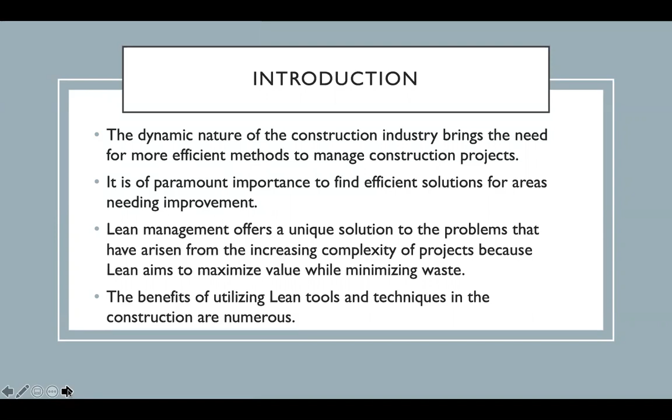Let's go to the background of Lean construction a little bit. Lean is an effective approach for both customer satisfaction and enhanced project performance. Therefore, Lean construction aims to deliver value to the customer. And Lean is even more effective when integrated with other tools and techniques or methods.

Therefore, this study discusses TRIZ methodology in the context of Lean construction. In this respect, the Lean TRIZ approach is introduced first to foster its application in the construction industry for experiencing less waste and higher value.

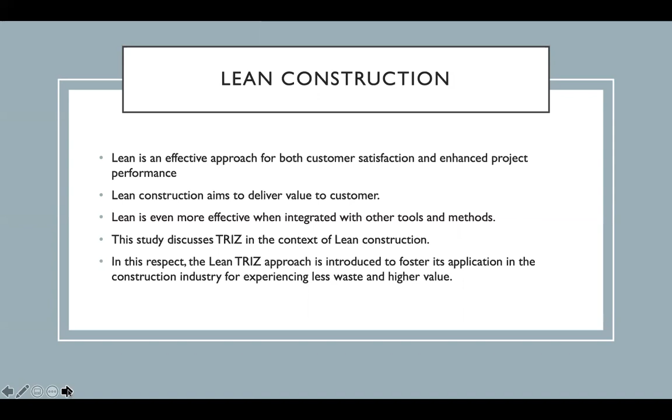TRIZ is the Russian acronym for the Theory of Inventive Problem Solving. It was first discovered by the Soviet Union researcher Genrich Altshuller. TRIZ is the theory of the resolution of invention-related tasks, and it's a problem-solving analysis and forecasting tool derived from the study of patterns of invention in the global patent literature.

TRIZ brings about 40 inventive principles, and it provides trends of technical evolution. It also provides an effects database having at least 76 standard solutions.

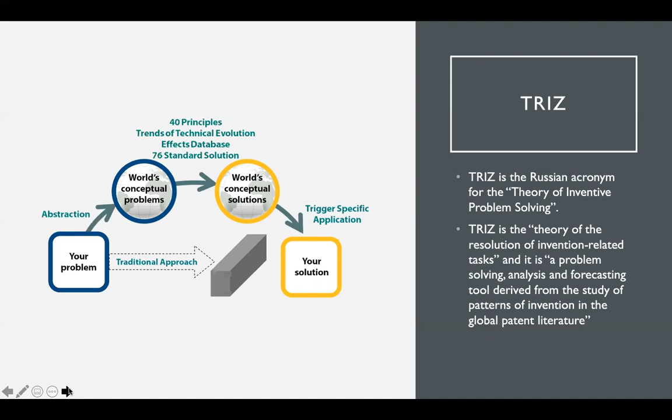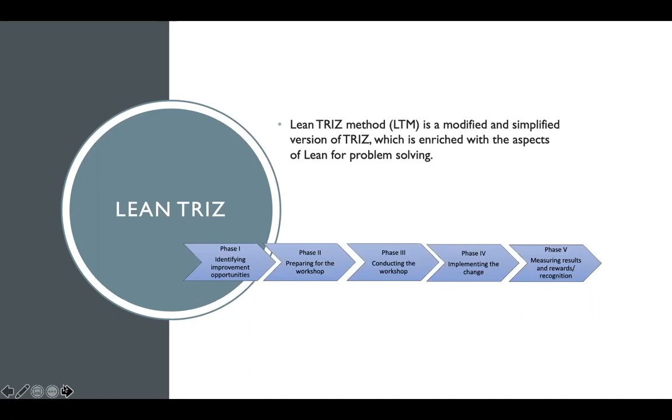So what is Lean TRIZ methodology instead? Lean TRIZ method is a modified and simplified version of TRIZ, which is enriched with the aspects of Lean for problem solving. Lean TRIZ method consists of 5 phases, namely identifying improvement opportunities, preparing for the workshop, conducting the workshop, implementing the change, and measuring results and rewards and recognition.

So, to know the Lean TRIZ method better, some examples are provided here from the safety aspect, because the Lean TRIZ methodology is a unique methodology that offers really safe solutions to construction-related, safety-related problems. And here are some examples from the industry in the safety context.

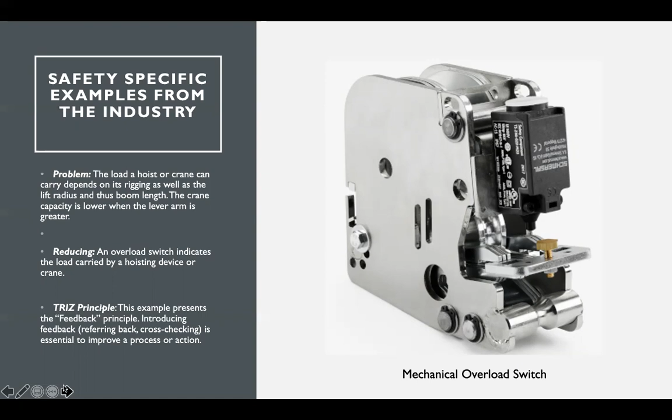So to summarize, we can say that the TRIZ principle of feedback is able to solve this problem by introducing feedback into the system or processes.

when concrete beams are typically pre-stressed, which means that the steel rebar within the concrete is put into tension before the concrete is poured into the fixture. This strengthens the concrete's ability to resist tension through the rebar, which in turn decreases construction costs.

And what is the inventive principle of TRIZ that actually addresses this problem? This example addresses the preliminary anti-action principle of TRIZ, which means creating beforehand stresses in an object that will oppose known undesirable working stresses later on.

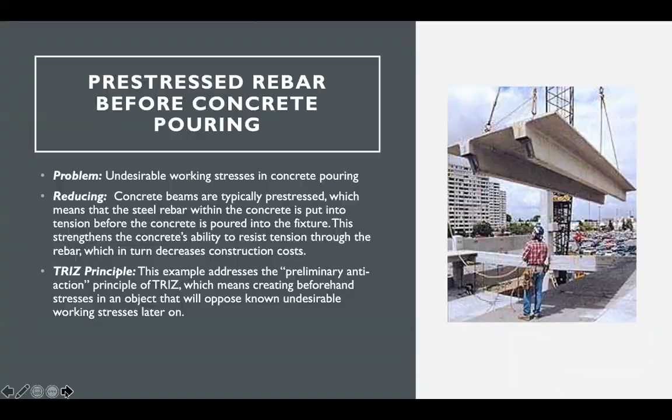And what TRIZ principle are we referring to here to solve this problem? This example addresses the principle of beforehand cushioning of TRIZ, which means preparing emergency means beforehand to compensate for the relatively low reliability of an object or system. The use of mistake-proofing tools, devices, and practices in the processes increases the reliability of the system. That is why we can say that this example relates to the TRIZ principle of beforehand cushioning to prevent errors before they turn into defects.

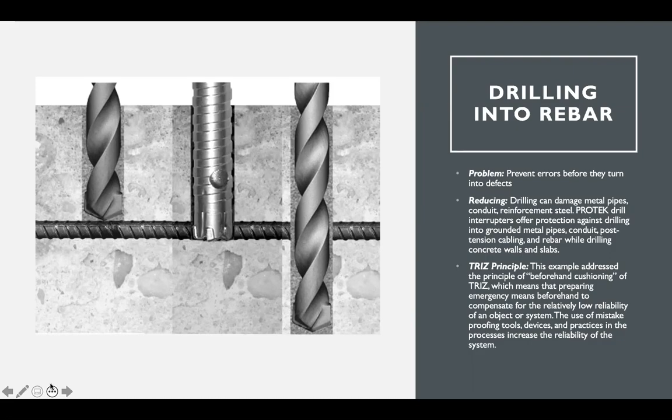Here's another example, which relates to worker fall protection. And what is the problem? In construction sites, one of the main safety problems is that workers fall from heights because they don't have any personal protective equipment or systems that protect them. So the problem is workers can fall from heights.

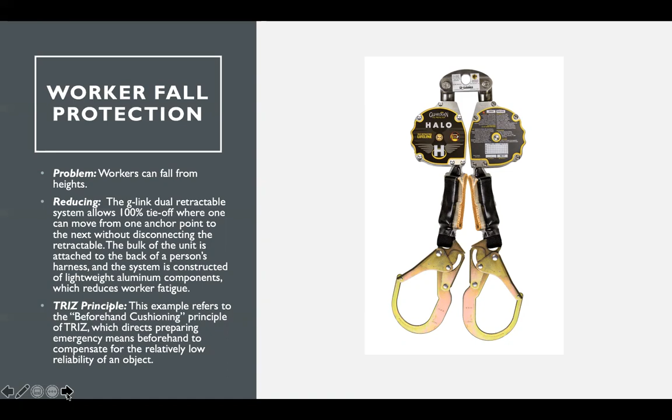And what TRIZ principles are we relating to here? This example refers to the beforehand cushioning principle of TRIZ, which directs preparing emergency means beforehand to compensate for the relatively low reliability of an object.

Here is the final example provided in the study, which is the andon display. Andon means billboard in Japanese. So with this andon display, we are aiming to remove errors by visual aids. The risk-reducing approach of the andon display is that andon is a visual aid that alerts and highlights where action is required. For example, it may be a flashing light in a manufacturing plant that indicates the line has been stopped by one of the operators due to some irregularity.

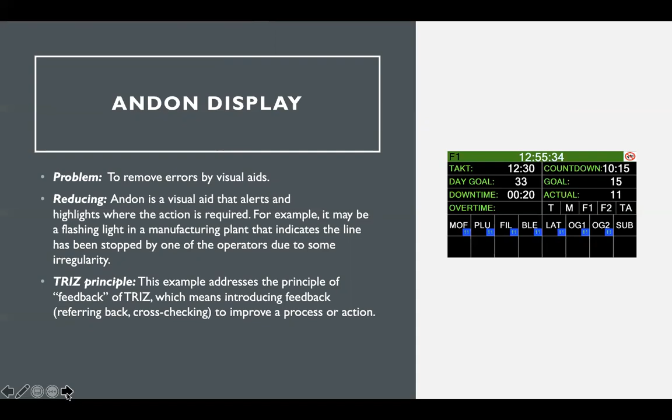And what principle are we referring to here to solve this problem? This example definitely addresses the feedback principle of TRIZ, which means introducing feedback to improve a process or action. That is why andon display boards are effective means of providing the right information at the right time to the right person. That is why we can definitely remove errors with these unique visual aids.

And conclusions, the takeaways from the study. Safety is definitely a major concern for construction projects. To eliminate or prevent errors in the processes, it is of utmost importance to design out errors and re-engineer the processes. That is why this study introduced the Lean TRIZ methodology, an error-proofing methodology for bringing up better product design and built-in quality. The method also applies to construction processes in terms of improving performance, mainly in the safety context.

This study aims to raise awareness of safety and promote safety performance with the use of inventive techniques such as the Lean TRIZ methodology. That is why the study is also expected to guide construction practitioners in utilizing effective tools and techniques to deliver projects successfully.